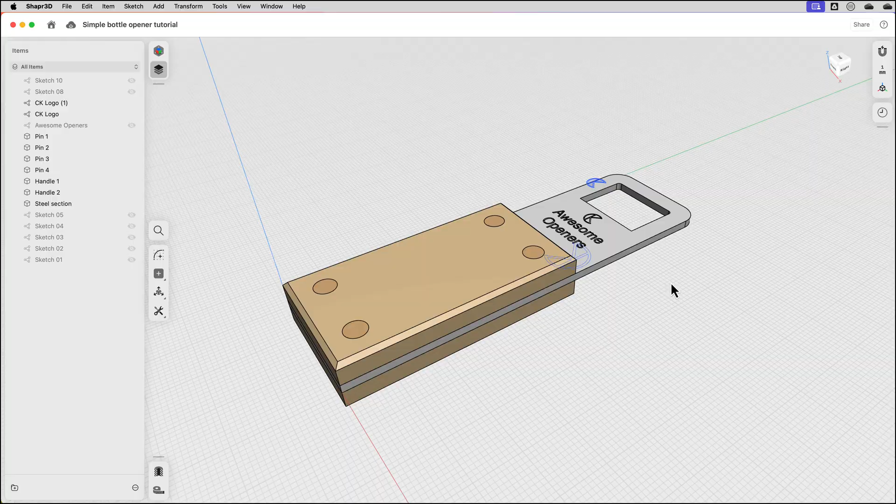At this stage, we have something that looks like it could actually work as a bottle opener. And as a simple 3D model, it's taking shape nicely. But it could do with a few more details. Let's look at a functional one first.

With any flat steel design, there's usually a small lip or tab on the inside of this opening. We're going to add that now by drawing a sketch onto this very thin inside surface. Then we'll use the fillet command to create some nice radius curves.

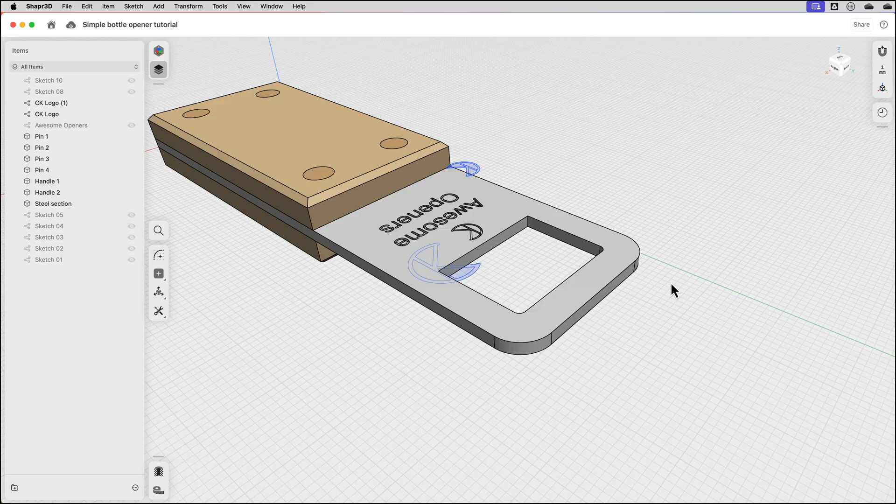Before I start, I'm going to clean up the screen a bit by turning off these sketches, as they can make things a bit visually distracting. Let's click those off in the Items panel.

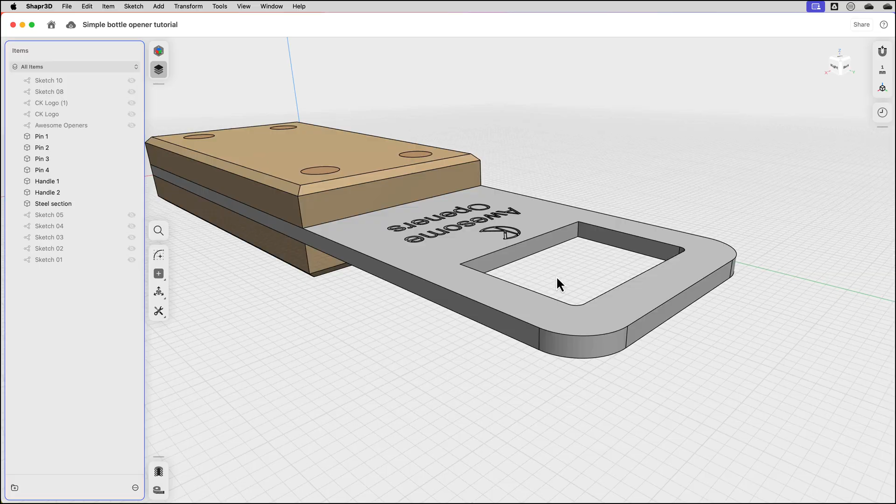Now zoom in and rotate so that you can hover over this inside face. Then press the spacebar or double tap the face on an iPad. You'll notice that we can't see the surface we want to sketch on. I'll zoom out and rotate a bit to make it visible.

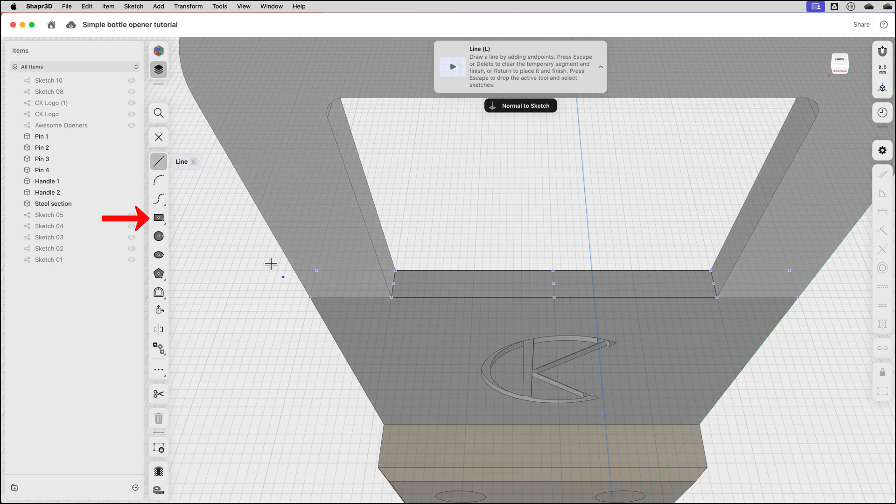Now you can see the snapping points on the surface we selected. These will become important. To add the tab, I'll draw a rectangle using the center option from this point. I'll make it 12mm long by 1mm wide.

Exit the sketch. Then extrude the sketch 2mm. We now have the tab that we usually see on bottle openers of this type.

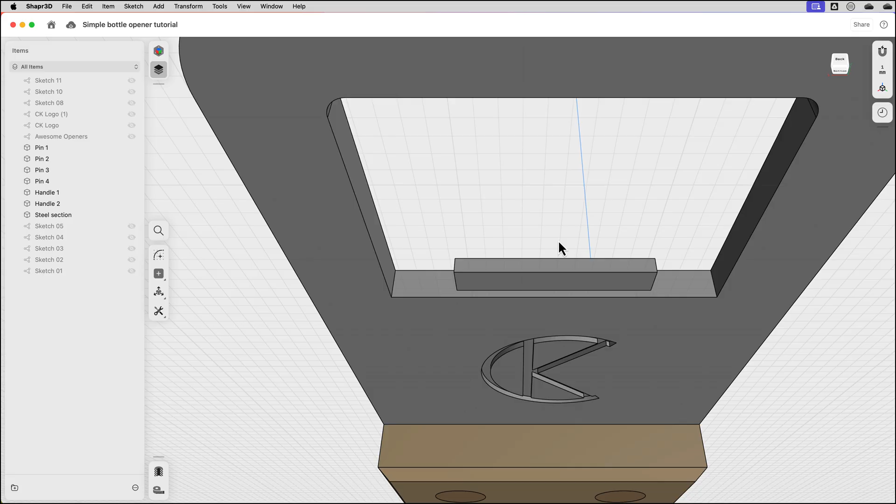Now we can use the fillet tool to make some adjustments to the design. Typically, this little tab would be stamped into the metal, which would result in some curved or smoothed edges. Using the fillet tool, I'll add a 0.5mm fillet all around the edge of the base.

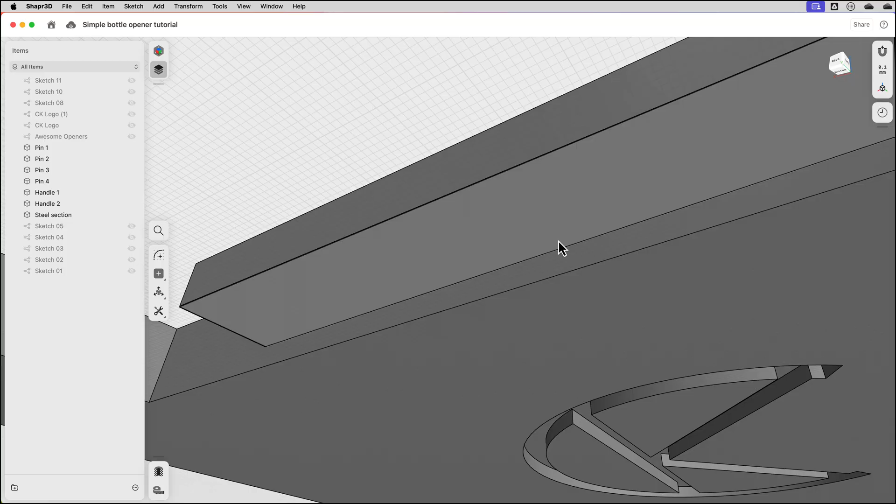Zoom in and click this edge. Then drag the arrow back or simply enter 0.5mm. Do this all around the base edge. You'll need to zoom in and rotate around a bit.

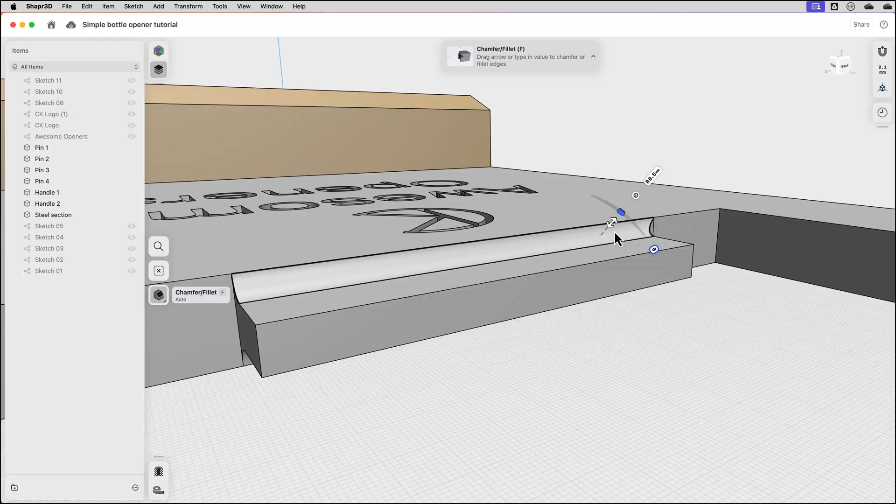Now let's add a 1.5mm fillet to the top corner to round that off.

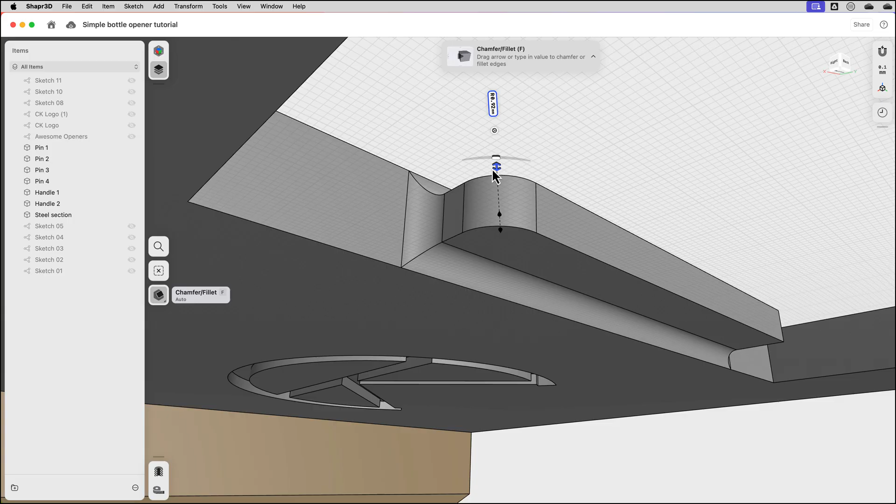That's looking much better. And you can see now that you can design small details like these curves more freely in the modeling environment, rather than try to work it all out first in 2D.

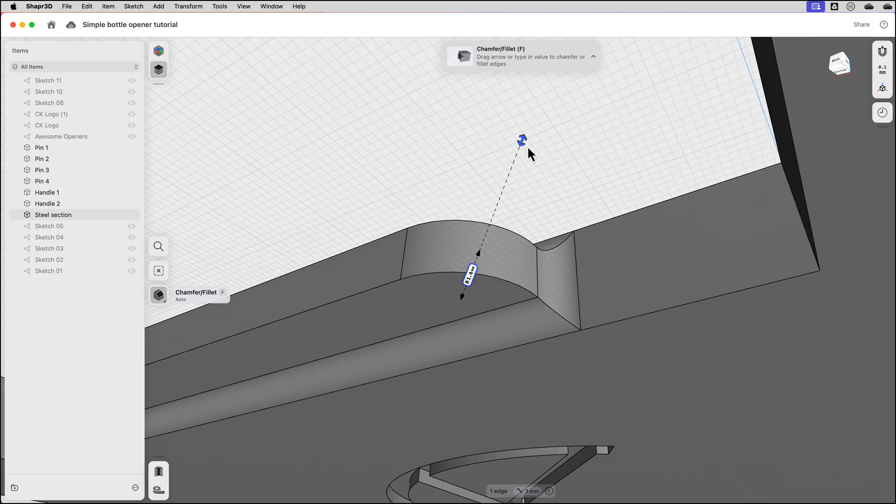For example, I can go back and manipulate these corner fillets to get just the right amount of curve, and I can see those changes happening in real time. I might not have been able to predict whether the fillet should be 1.5 or 1.2 or 1mm, but when I see it happening, it makes the process much easier.

In the next video, we'll look at different ways to view parts of your model using section views and moving bodies around.